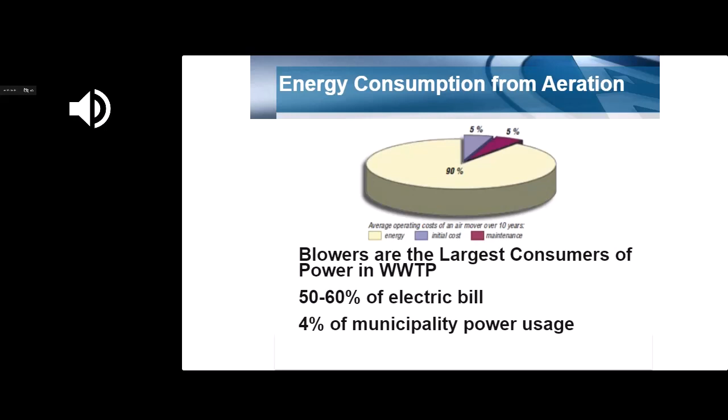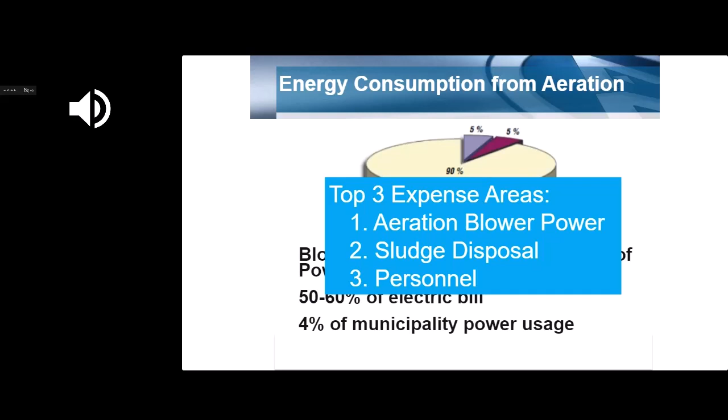In a wastewater treatment plant, blower power is probably one of the top three costs, along with sludge disposal and personnel costs. So energy efficiency becomes kind of a big deal, and picking the correct technology becomes a big deal as well.

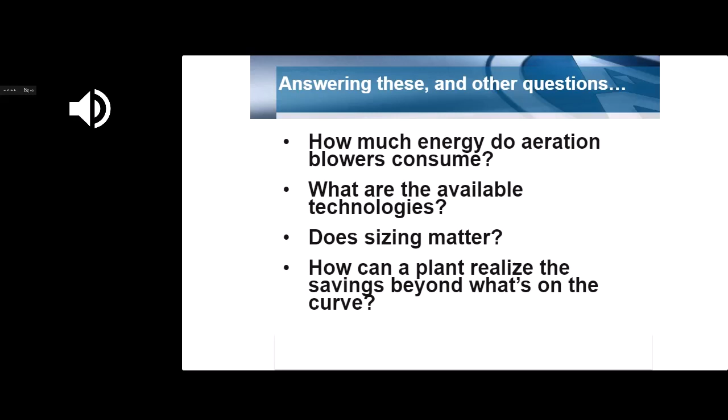So big questions here would be: how much do they consume? What are the available technologies? Does sizing of the technology or the blowers themselves matter? And how can the plant realize savings beyond what's actually on the performance curve? So I'm going to focus on the products that Aerzen brings to the table: the screw type, the single stage gear turbo, and the high speed turbo blower for my presentation today.

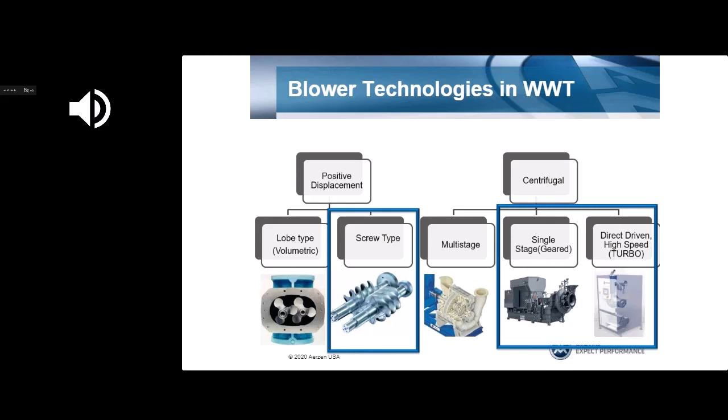The screw type blower has become probably one of the fastest growing technologies in a wastewater treatment plant, primarily because, depending on the pressure, it has energy efficiency that's comparable to single stage centrifugals. So why would you use one over the other?

The screw blower is built to a specific compression ratio, and typically when you get above 8 psi, you're getting into the area where you really start to see the energy efficiency. Turn down is another area that's probably more prevalent, where they've just replaced older blowers with newer blowers, because they're sizing the blowers for some level of expansion in the future. Where you run right now becomes very important, and this becomes a major factor in turn down ability, meaning the ability of a blower to reduce its flow from the design point to the minimum.

And you can see screw compressors can be much more flexible than a single stage centrifugal. Cost is comparable to turbo. As you get into the bigger sizes, you're buying a lot more metal with a screw compressor because it's positive displacement, so you have bigger lobes and a bigger footprint. So single stage centrifugals can be a little bit more cost effective when you start to get up above 200 horsepower.

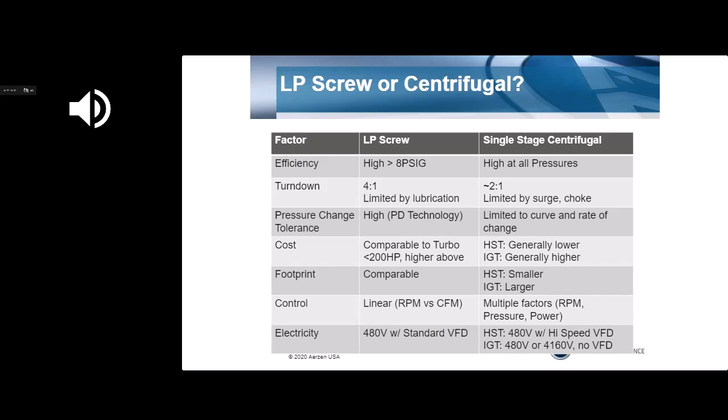Footprint is comparable. Control is linear, which can be a very big factor when you're dealing with standard VFDs. And then for electricity, typically a standard VFD, high-speed turbo, you really don't have the flexibility to go with a medium voltage, whereas with an integral gear turbo, you do. So proper selection into the right technology means the process that it's feeding into.

An activated sludge basin with conventional aeration typically has a fixed pressure, so you have a constant level and a variable flow. Actually, any of the technologies would be appropriate.

On an SBR, where you typically have varying pressure, especially when you're doing a mixed fill, you're really more in the realm of positive displacement, because positive displacement is constant volume against the varying pressure, meaning no matter what the level is, as long as you have enough motor horsepower to overcome that higher level, you're good. Whereas with the turbo, it basically lives on the performance curve based on the size and configuration of the impeller itself. So you may run into trouble here, or you might not.

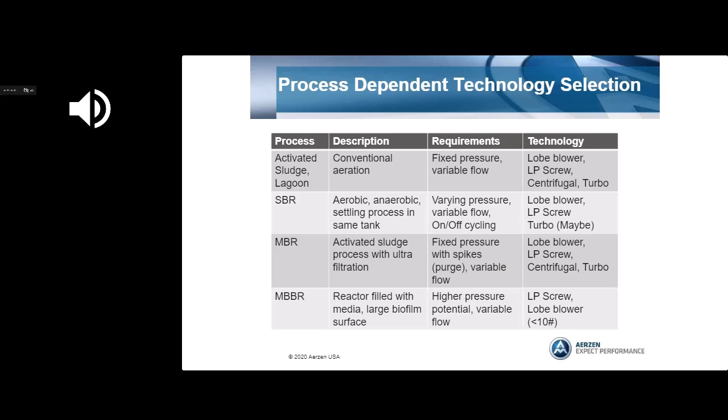So what gave rise to these more efficient technologies? It really was all about the money. In the mid-2000s, there were a lot of utilities out there that were providing grant money to municipal plants to offset the higher cost of a more efficient technology.

And so this gave rise to a lot of the, especially the high-speed turbos, that you see on the market today.

So the major manufacturers today: what you'll see on the low-pressure screw, typically the major manufacturers would be Aerzen, Atlas Copco, and Kaeser. You saw the presentation from my colleague at Kaeser before. The high-speed turbo, you typically see Aerzen, Neuros, and ABS, and ABS actually is now called Sulzer. And then on the gear turbo, there was Lone Star, Next Turbo, and Turblex, which is now owned by Howden.

So what was the key to success with any of these technologies? Probably the biggest key was reliability. When the high-speed turbos first came out onto the market, there was still a bit of a learning curve that accompanied that, because they were still learning the market and they kind of overexpanded. But the companies that stuck around were the ones that invested in the technology itself and made it more robust in the wastewater treatment market.

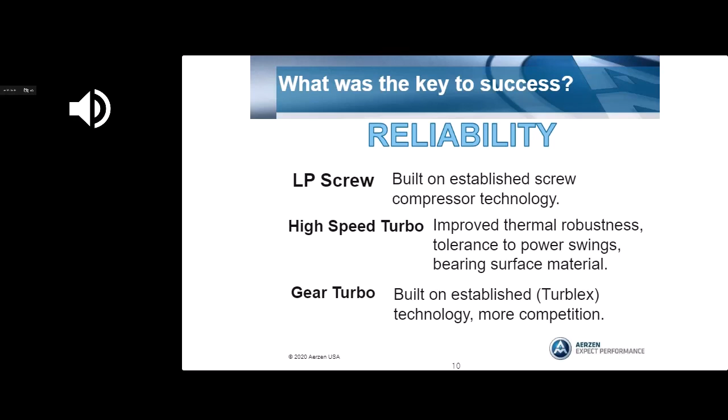So how do you compare the technologies available for a given application? Well, because Aerzen has all three of the major technologies - the turbo, the screw compressor, which we call our hybrid, as well as our PD blower - we can actually run a comparison on site based on the site conditions.

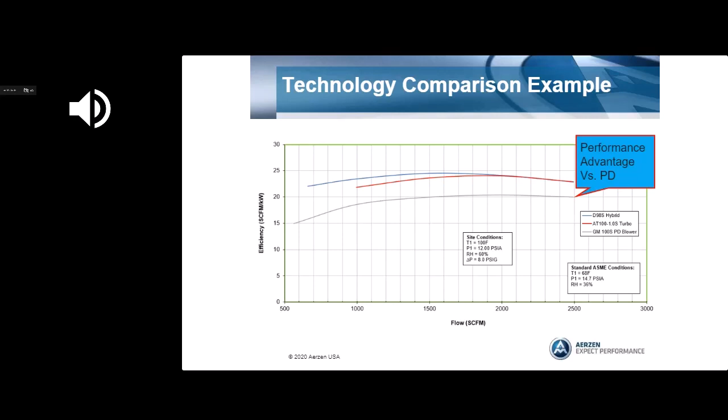And when it came down to the turn down level, which I mentioned in one of the previous slides, you actually get much better turn down with the screw compressor than you do with the high-speed turbo. And again, what we're doing here is comparing all of the Aerzen technologies. I'm not looking at any competitors here.

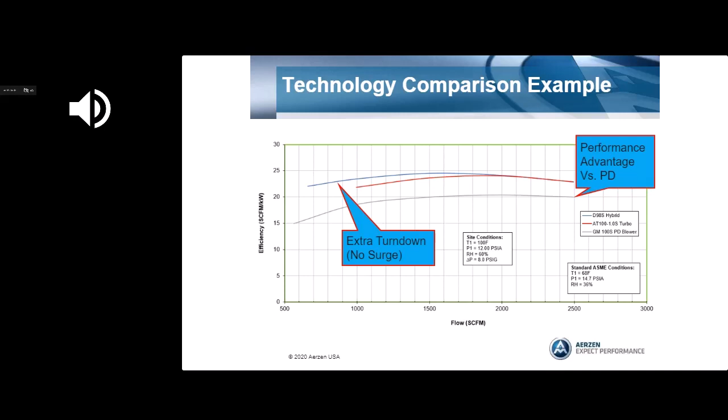And again, comparable performance. So what does that mean in the system? Well, you're not only dealing with efficiency, but you're also dealing with capital cost as well as the turn down.

Just looking at a snapshot of the three technologies we had available for this particular project, the turbo was certainly the cheapest in terms of capital cost. It was equivalent to the screw compressor, but the big advantage the screw compressor had was the amount of minimum flow available. So depending on the operating conditions the plant was running, it could either go with the turbo if this low point was okay, or if it needed to be much lower, then this may be the way to go.

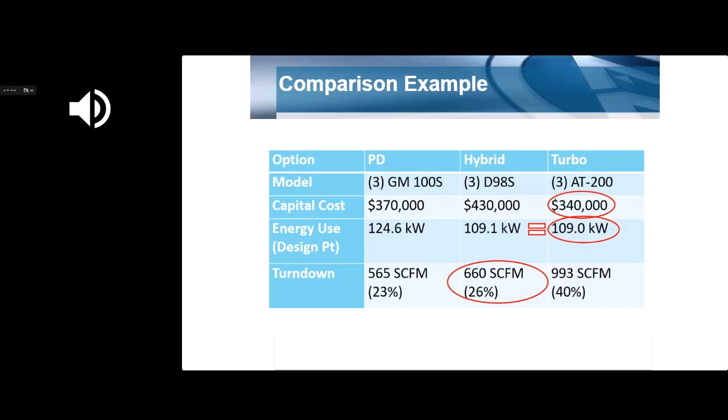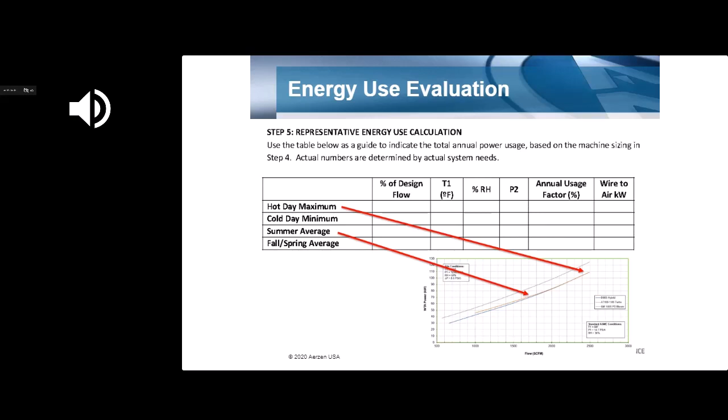So when a company or utility is doing an energy evaluation, what I did previously was just a design point comparison. It really matters to do a decent evaluation based on what you're expecting in terms of operating conditions. At the very least, do the hot day maximum, the cold day minimum, and at least the seasonal average to determine your anticipated power usage over the course of the year. Again, a little bit of a crystal ball here, especially with new equipment, but at least this gives you a comparison to look at all the companies competing on a particular project.

The way you do that is you look at the anticipated operating points, assign time and conditions, and require the manufacturer to provide the total amount of power required. I say this primarily because of the high-speed turbo. When it first came out into the market, it was a much more integrated package because you had the VFD or inverter inside the package, the control panel, and cooling inside that package. It was not a clear-cut case of taking the stage efficiency and comparing it to the others.

So this is why PTC 13 came along, which was not only a way to verify performance for the high-speed turbo, but also for the other technologies as well. And Aerzen actually built a PTC 13 performance test bay, which was good up to 1,000 horsepower, so we are able to give you an even playing field from our standpoint.

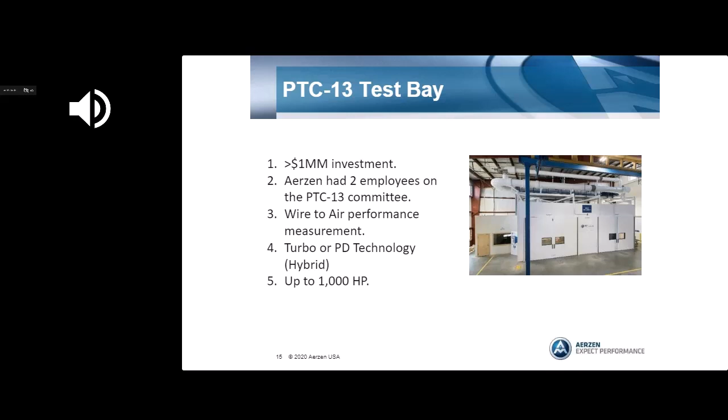The other aspect of sizing is, typically when an engineer is designing a project, their big bite at the apple is this capital improvement project. And they have to factor in the potential expansion, whether it's additional housing projects going up, or additional industrial users that might be moving into a community.

But typically what I see is when it goes from the 90% design to 100% design, they'll add a little bit of a cushion. The problem is, no matter what the supplier is, that could throw them into the next size up. Come bid day, when we've been working on a specific size of blower, all of a sudden they're adding additional flow or doing unrealistic ambient conditions that end up throwing us into a larger size machine, or any manufacturer into a larger size machine, costing the project more, and also forsaking the minimum flows.

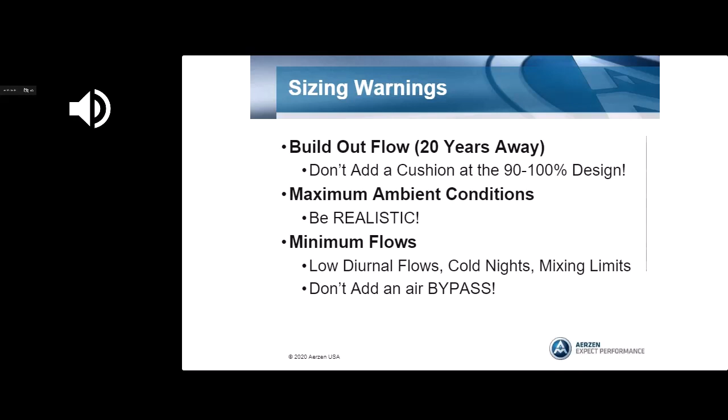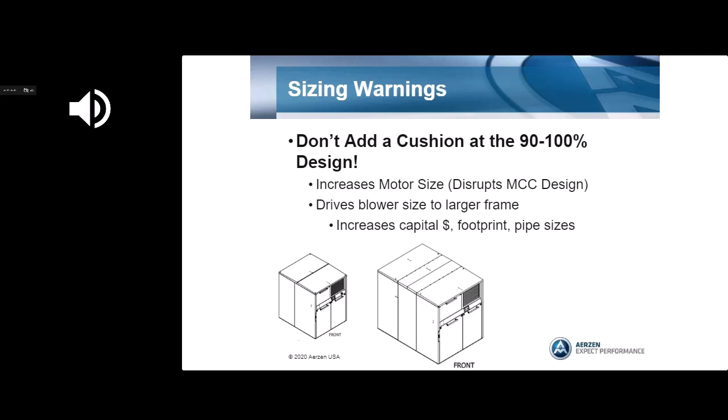Here's an example. What may end up happening is if you end up bumping up the flows, say from 3,000 CFM to 3,500 CFM, this was the model we would have had available for the screw compressor. If you bump it up to 3,500 SCFM, all of a sudden we're in the next size. The cost goes up by a major factor, the pipe size goes up by a major factor, and suddenly the footprint is no longer what they had originally sized it around, but now we're in a bigger unit. This is more common than you think.

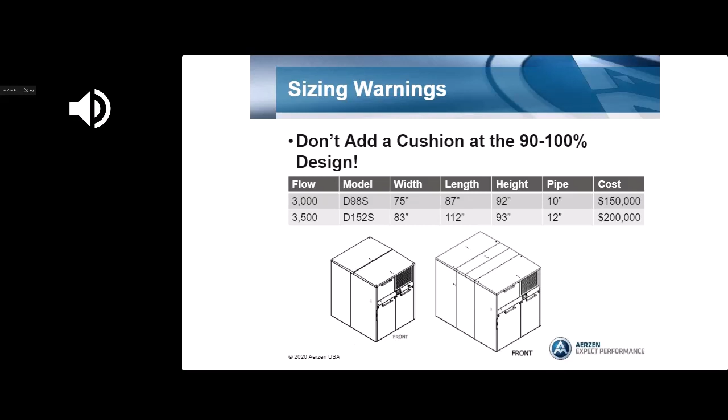So it's something to watch out for when you're working with your consultant as an owner at the plant. So another factor is ambient conditions—again, a big impact on the sizing of the unit itself.

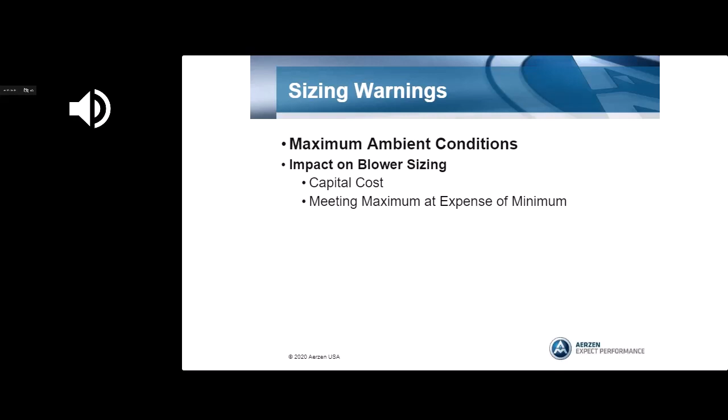Here's an example in a California plant where we had 2 large turbos and 2 small turbos. The idea was that the smaller turbo was going to act as a jockey blower, and when the maximum value was hit from the jockey blower and the demand was still higher, the larger blowers would turn on. So the idea here is to make sure that the maximum for the smaller blower effectively overlaps beyond the minimum of the larger blower.

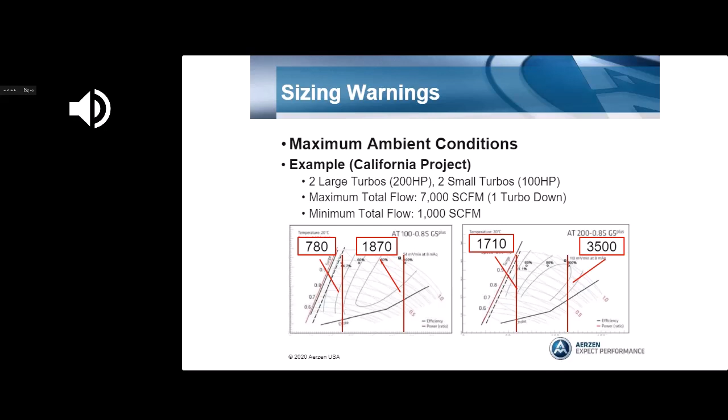So that was all well and good until they assigned 115 degrees Fahrenheit maximum temperature and 90% relative humidity. The problem was it limited the top end flow, and it all of a sudden brought it out of the realm of reality and more into the next size.

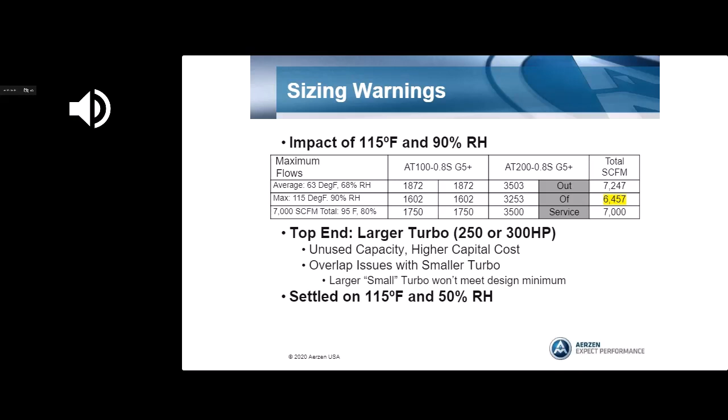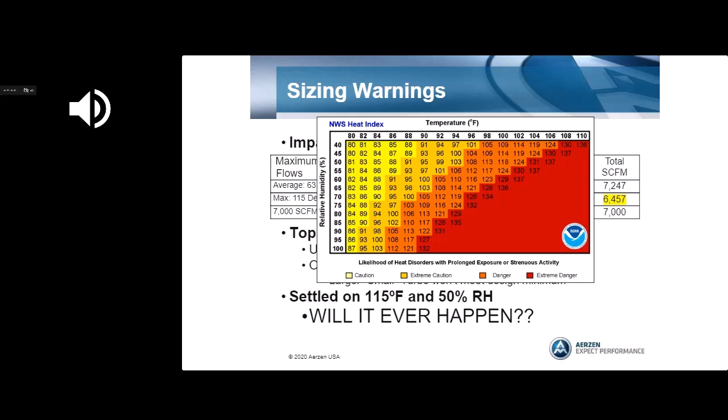This is one of those heat and humidity indexes, and for 115 degrees, it's not even on the curve. You combine that with relative humidity of 90%, this is actually unlivable conditions. So it's not something you're ever going to run into, but there it was in the specification, and we had to meet it. So the caution here is to make sure that at least the ambient conditions and the maximum flows are somewhat closer to the reality of what the plant is going to face.

Now, one thing that some engineers have done is to actually add a bypass on the compressed air line. You think about it—we went through a lot of exercise in trying to figure out the most efficient machine possible for the particular application. And here, the engineer comes in and says, well, if we need it, we're going to bypass this. We're going to blow this efficient air into the atmosphere.

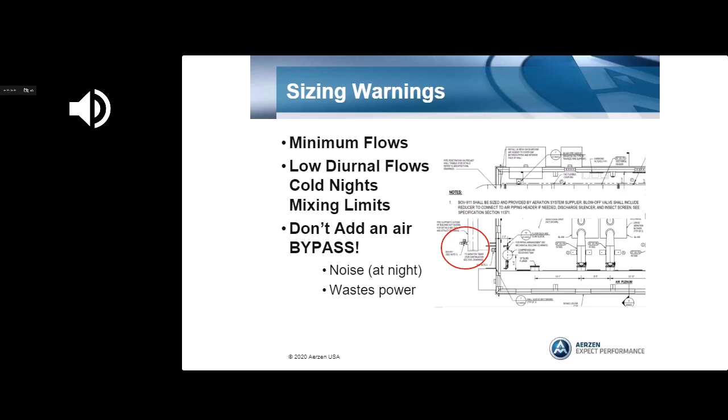Usually this is when the conditions are such that the flows are low and the BODs are low, and it's in the middle of the night. So we're waking up the neighbors and wasting money. Again, another caution where you're just taking all that money and just blowing it away.

Using a jockey blower is usually the better way of addressing these low flows, rather than worrying about the minimums on the main process blowers. If you can have a smaller blower that can actually take up those minimums and not bypass, you're well ahead of the game.

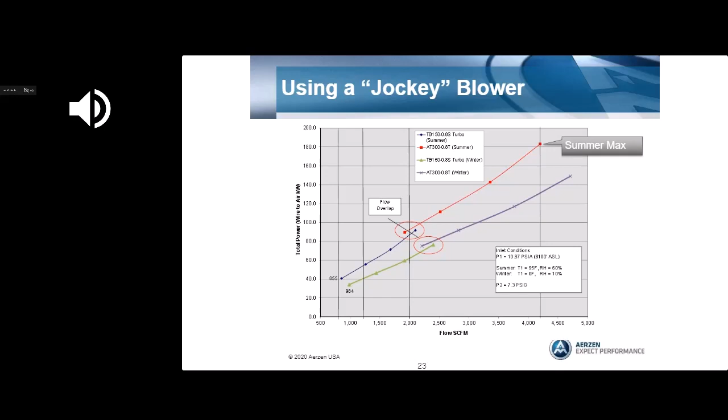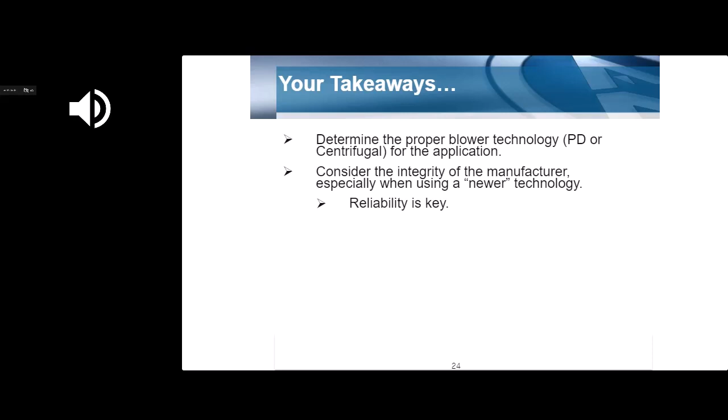So the takeaways here would be to determine the proper technology for a given application. Consider the integrity of the manufacturer, especially if you're using a newer technology. Reliability is absolutely key with this, so that you know that you're dealing with a manufacturer that has a reliable product with a proven track record. Consider your current flow requirements when deciding on the blower size, especially the low flows, and evaluate your energy use properly.

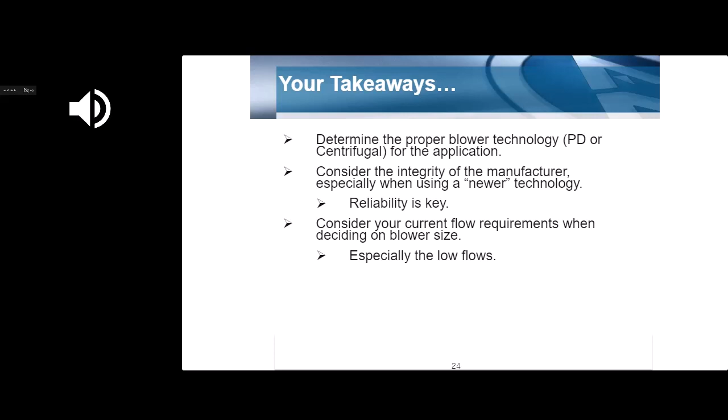So I'll leave you with this. Which technology is best? If all you have is a hammer, everything looks like a nail. So with that, I will take any questions that you have available.

Well put, Tom. Well put. As always, great presentation. I have about 30 seconds here, and I have a question. So if you could go lightning round on me here.

After the first sizing warning slide, why wouldn't the municipality want the biggest machines they can get? I mean, especially if there's a chance at funding the project.

Absolutely, and that is a very common question. It's like, this is our bite at the apple. This is our time to get this capital funding, so I want to get the most that I can. And the problem is it ends up being oversized, so that what you're dealing with in the current condition may not be able to be reached by the minimum available flow from the blowers that you're dealing with.

Makes sense. That was very efficient in terms of the time there with that question, so I appreciate it. Good job as always, Tom. I can't wait to have you back for next time. But fantastic, thank you for joining us here. Looking forward to it. Much appreciated, Tom. All right, thank you.